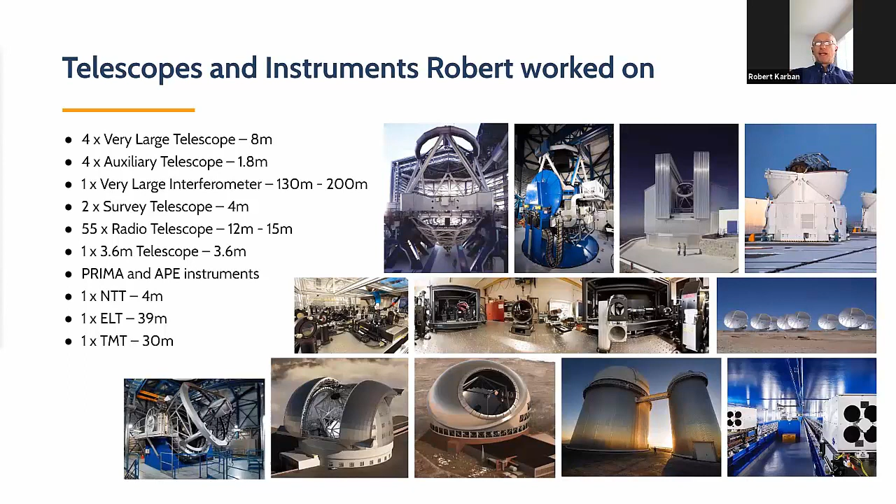My background, most of my life, I've spent with telescopes, mostly optical, a little bit of radio. Also, me and my team contributed to a number of missions at JPL, most recently Perseverance, which happily landed on Mars, thanks God, and everything is working perfectly so far, much better than expected.

You mentioned already the goal-oriented architecture. That's from a recent paper that we published at SPIE with my ex-colleague and friend Luigi from ESO. We've been working on that for a while, but it's just recently been published.

So what are we dealing with today in telescopes? What everyone knows is that most of them are one-off machines, and there's a substantial amount of emergent behavior. You have all these subsystems, and they come together to produce the behavior that is needed to perform the observations.

I guess it's the same for the SKA, but I'm talking more here from my experience on the optical side. There's an increasing number of operational modes and control strategies required with the scale of the next generation telescopes, and they need to be coordinated, and they're often subcontracted subsystems that have to be integrated.

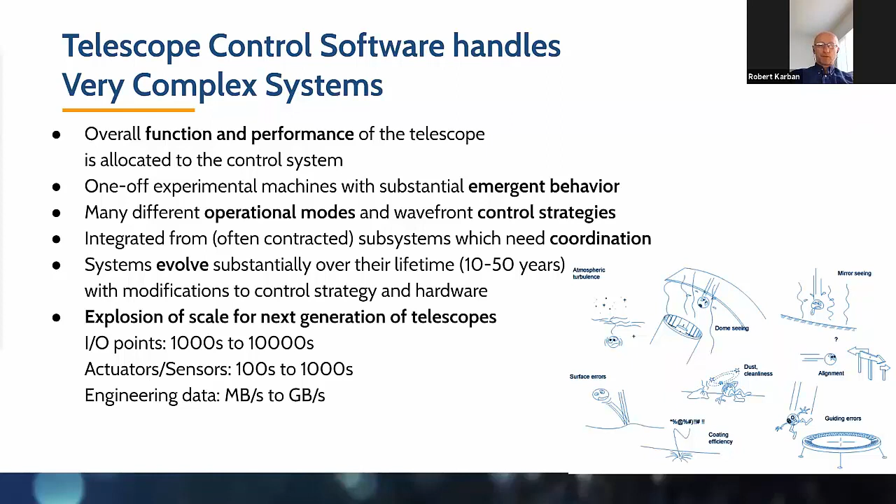The lifetime is very long, as you know. Here's just some numbers from the ELT that I know, and other extremely large telescopes like the TMT: the I/O points have increased by an order of magnitude, the actuators and sensors have increased by magnitude, and the engineering data flowing has also increased. So we're dealing with quite complex systems compared to what was there 20 years ago.

Now, due to this scale, we have also an increased risk of component failures because there are a lot of components and they might fail anytime. So the control strategy must be flexible and adaptable to deal with those failures and reconfigure - first detect the failure, isolate it, and reconfigure the system if necessary to deal with it.

The poor human in the loop is sometimes getting more and more overwhelmed by the available information on their screens to make the right decision depending on the operational scenario. And there is a lot of interacting and distributed control loops, typically with many connections.

When modifications are made, a number of implicit and explicit dependencies have to be considered in the software. So you might turn a little wheel here, which has an effect somewhere else, which makes it sometimes hard and difficult to tune the individual loops and integrate them end to end.

So how we want to tackle that is with a goal-oriented architecture that is based on goals and states. Let me give you an analogy. Everyone, I guess, knows Google Maps, right?

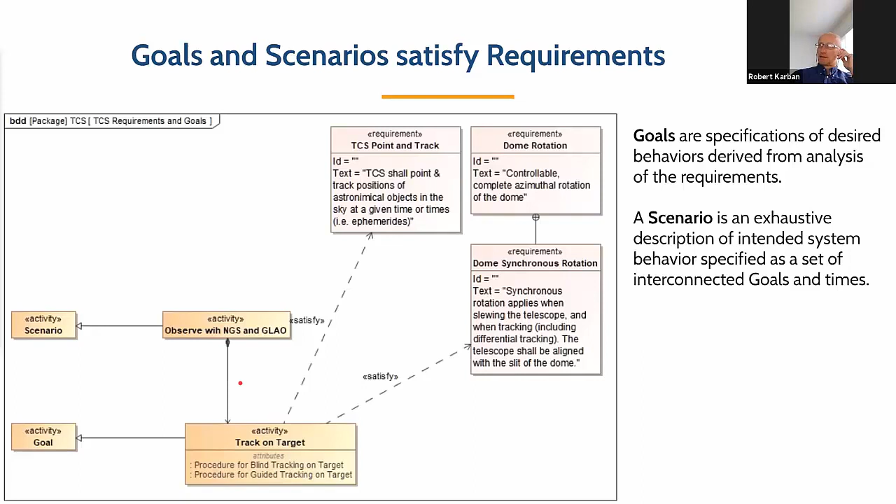And then you establish some goals, like you want to track on target, but you don't really care how you track on target. That's something the goal doesn't specify, it just specifies maybe some parameters, some constraints, but how you actually achieve that is up to the control system. And some scenario, what some people call the goal network, which consists of a number of goals. Here's only one, but there could be a whole bunch of goals. They can be interconnected, depending on each other and so on.

Now, with that goal, those goals, we refine what we call procedures, right? So depending on certain conditions, here the example is we perform either blind tracking or guided tracking on the target. So a number of environmental conditions, and that's happening on the control system level. So you say track on target with certain constraints like the accuracy and so on, and then based on some procedures and some predefined rules, the control system will select what to do, right? What's the best thing to achieve that goal.

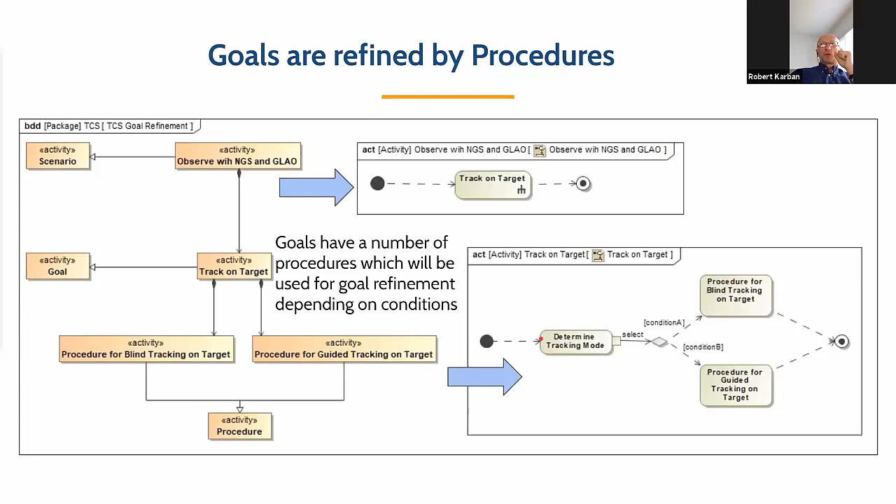And we capture all that in the model, right? So we capture the requirements, the goals, the scenarios, and they're all connected. So that's all coming together in the model.

But the real driving thing for those goals is: what do we want to control? And that's often not so clear. So what is introduced in this architecture are so-called state variables. These are the things you care about in your system, internally but also externally. And here are some examples.

So one state variable is the telescope pointing on sky in altitude and azimuth. But it is affected, and it affects some other things. For example, the observer position on Earth is affecting that pointing, the rotation, the modeled imperfections of the mount, but it also affects the target wavefront, right?

So these are state effects, as they're called. You identify all the physical states that you care about in the system, but also externally, and determine how they affect each other, right? And these are basically the things you have to control when you build your control system. Some you cannot control, of course, like the Earth rotation, but they have an effect on you.

So the goals are constraints on those state variables. When you have a goal, it's associated with some state variables. For example, I want to have a goal to point on the sky in certain coordinates. And then from there you say, okay, if I do this, then I also have to take care of true pointing, the azimuth position, the altitude position, the imperfections of the telescope,

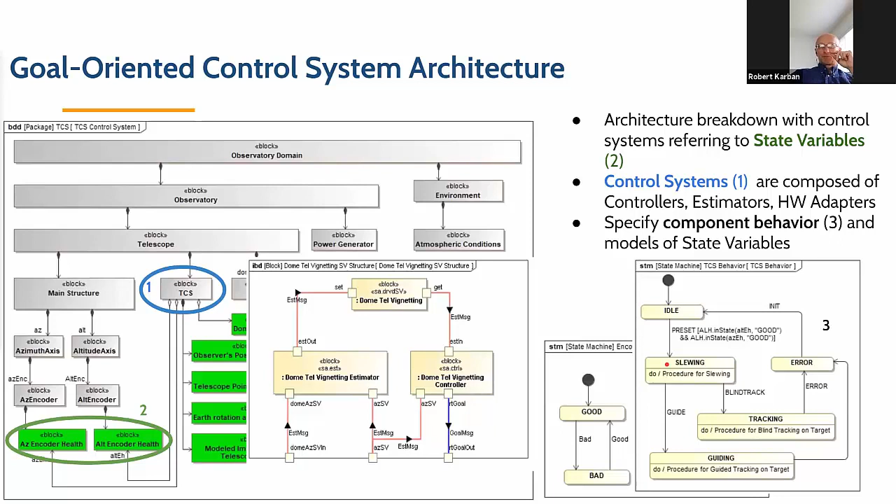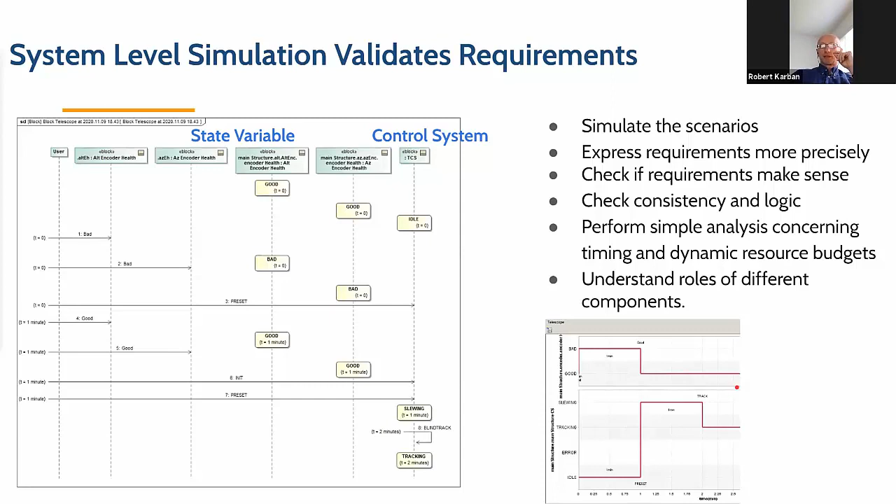And then you send that to the control system, and the control system, based on that goal and its strategy, does whatever it can to reach that goal, right? And if it fails, the planner executor, similar to Google Maps, will find a way to reach that goal by issuing new goals. And then you have some plots here.

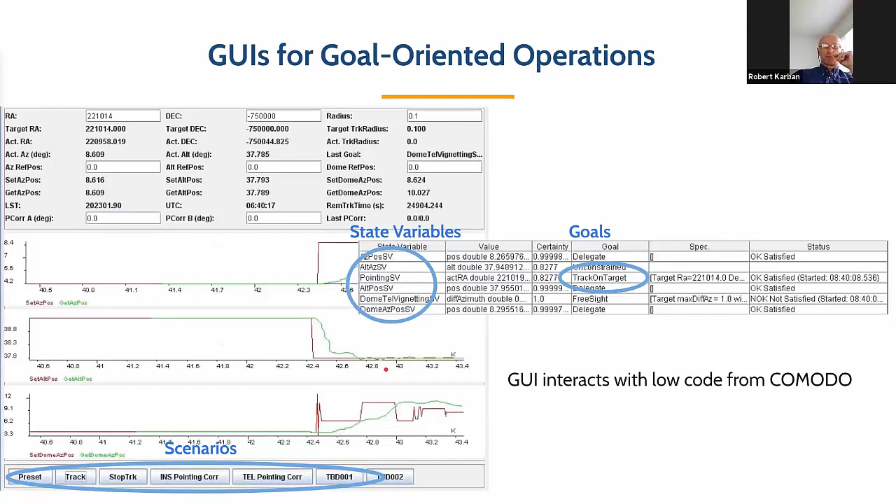So that architecture, what is important is that with the state effects model, you basically represent the end-to-end knowledge. So you identify deliberately everything that you want to control or need to control, or which affects your control. So you can identify the necessary goals, enable the reconfiguration, rescheduling of the goals to adjust to new situations, but it also enables the end-to-end tuning.

So we also have a separation of concerns from what the control system is, what the system under control is, and that allows us to better design the control system, identifying the measurements, what is estimated, what is controlled. So the state-based pattern that I mentioned before, the control diamond, allows to extend this control system in a consistent and systematic way. Whereas often it happens, you just add things. Well, maybe not usually, but sometimes it's a mix of course of engineering judgment and architecture, but here you have some guidance of how to do that.

So I spoke about the executability before, simulating it. So what is it about that? So why do we want to have an executable model at system level at all? Why don't we just go ahead and make some diagrams and start implementing? So the main point, if you build a model that actually can execute and simulate, is that you increase your understanding of the system before or while it's built. And you'll see you can capture the logic, the interaction, the interfaces, and validate the requirements in a system model.

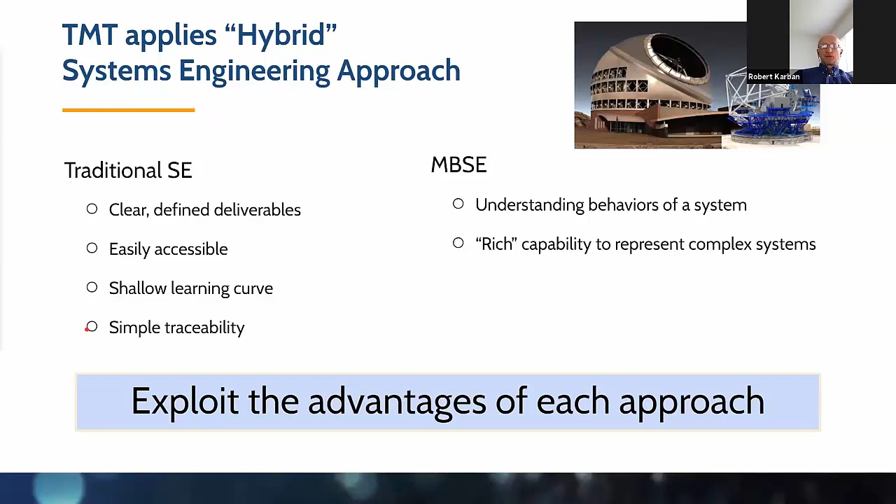But of course, there is all this other traditional system engineering going on. So in the end, there is a hybrid that uses the advantages of both. We use the MBSE focusing on, let's say, the behavior, but also the functional interfaces, and to perform analysis, and combine it with the traditional system engineering approach. So the objectives there are and were to capture operational behavior, which subsystems are involved in those operational scenarios.

Very important, and this is something that came out, is that the interfaces and how the subsystems interact kind of emerges when you capture that. There's a lot of timing requirements, that certain operation scenarios have to happen in a certain time. So we captured all those timing requirements, formalized them, and had an executable model with state machines and activities to specify that, and then to analyze if we meet those requirements in terms of time, power, and other error budgets.

Using the model, we also produced a number of engineering documents, and we used only standard languages and techniques and off-the-shelf tools. So there was no custom development to enable that. And this is something you get out of that.

So that's a sample TMT timeline where you basically see, for a typical scenario, the involved subsystems or components of the as-designed system, the states, and the timeline of which component is in which state for which amount of time, right? I think that's the scenario for extracting a segment, replacing it, and phasing it again.

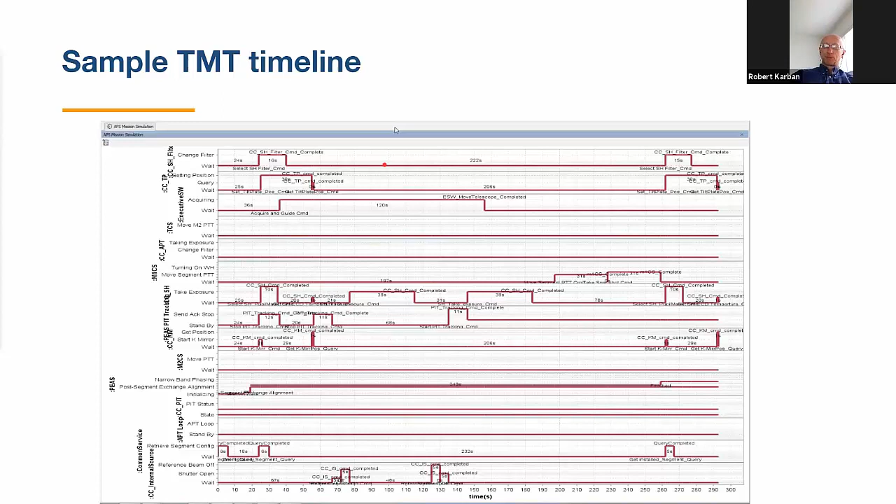What you see here is basically the overview of the workflow that enables that. We have some requirements that are textual, coming from the TMT project office. We capture those requirements in the SysML model. We formalize them in some way so we can actually trace them through the whole model, not only as text but as a formal element.

And then we have two designs. One is the logical conceptual design, where we basically identify the components and how they interact at the functional level, which we then use to validate the functional architecture, and a realization or implementation model where there are actual boards and translation stages and so on, in this case used to analyze the power draw of that system.

And we perform automated analysis for a number of scenarios to validate if that as-designed system can meet those requirements. Whenever we change something in the design or the requirements change, we go through this workflow and we get a result of, okay, still met, not met. And we produce the engineering documents from that.

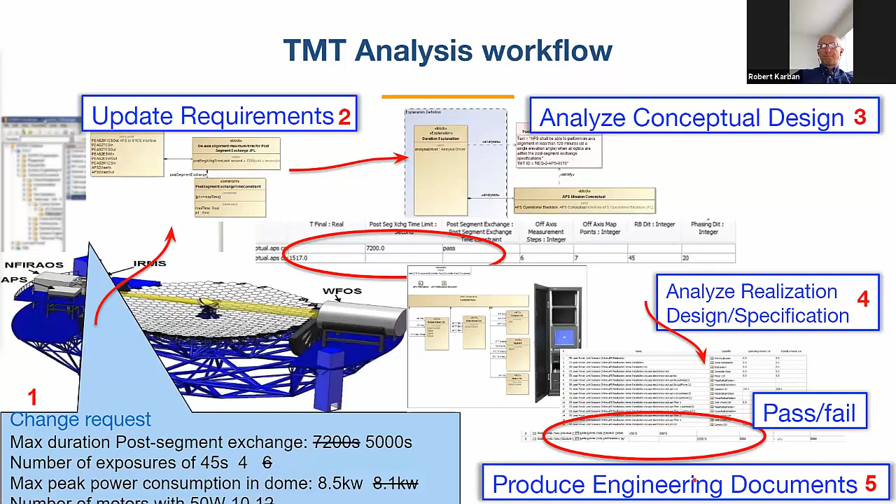So we follow a method, which is the executable system engineering method. Basically five steps: we identify the boundaries of the mission or the system that we want to build, elaborate the conceptual architecture, capture the component behavior and the characteristics, specify the interactions, and then perform the analysis. So let me run through this a little bit.

So this is an overview: we get some specification from the TMT project, we meaning JPL. We elaborate that into some logical architecture, identifying that's the system we have to design. It interacts with a number of other systems that the telescope provides, and we identify those interfaces. And that's an incremental process. It's not that everything is there upfront, but we capture all those elements, and the architecture evolves driven by the behavior.

There's a number of use cases that we model: the post-segment exchange alignment, off-axis measurements, and so on. And for each of these scenarios, we basically capture the behavior, perform the analysis, and see if the as-designed system satisfies those requirements.

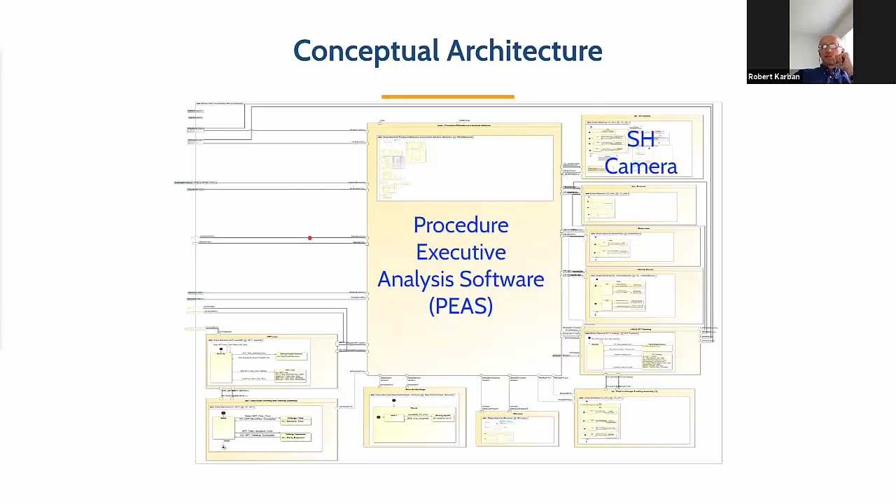So this is the alignment and phasing system software, which interacts with the TCS, M1, and other systems to achieve the goal. And all the components are modeled, all the behavior is modeled.

So here is an example of the scenario I mentioned before, the post-segment exchange alignment. It's a number of states that you have to go through to align, phase, correct rigid body, and so on. In each of these states, there is some activity that describes what to do: take an exposure, identify the spots, and then correct the telescope, right?

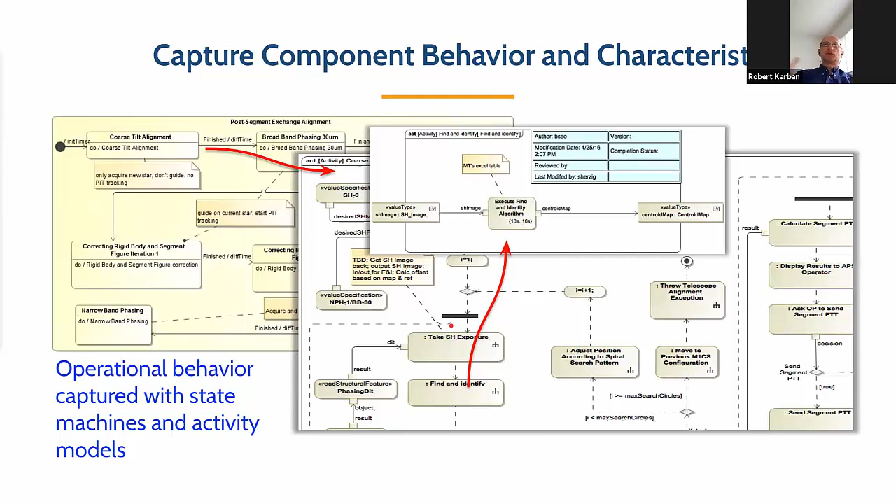And that sometimes goes five or six levels deep. There we capture basically the logic, but also timing constraints, so we can analyze, when we run through this whole scenario, whether it meets that specification.

Now, since there is not only one component but many, they also communicate and interact with each other. And that turned out to be extremely valuable, because by combining capturing the component behavior with their interactions and then simulating, you actually execute your interfaces. And I repeat it, you execute your interfaces. I think that has been a big benefit.

So you see, okay, these are the interactions, these are the interfaces, and with the simulation analysis in the executable model, we can actually see what is necessary as an interface, what runs over the interface, how it is used, and how those different components interact internally but also externally.

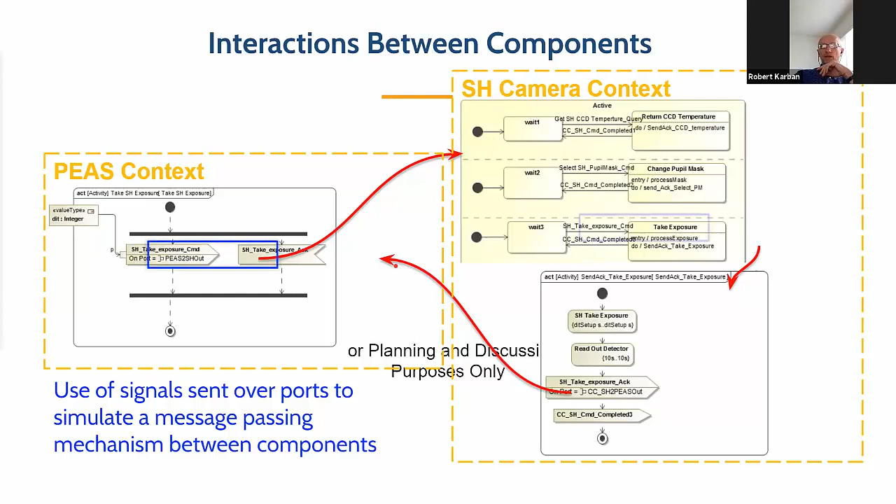And then you run the analysis that gives you, depending on what kind of analysis, a number of results. You configure the analysis with certain conditions. You run a timing analysis, a power analysis, and you get some plots, tables, and value profiles that you can integrate into your documentation.

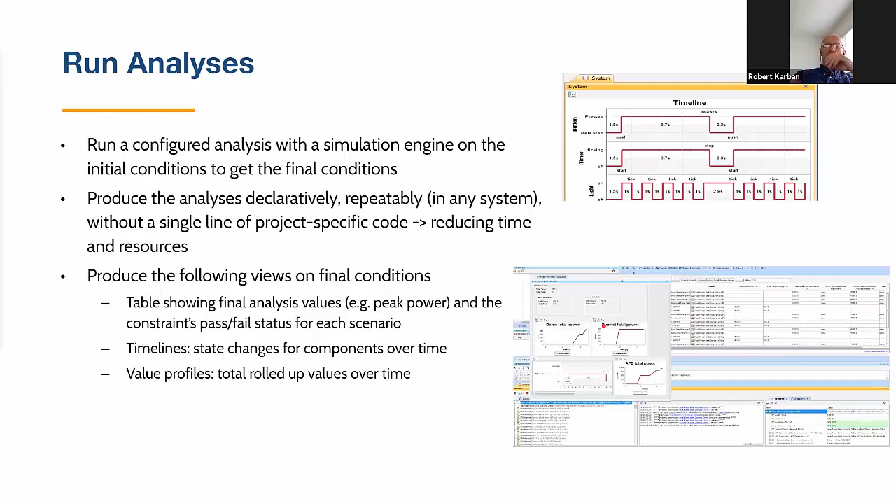Now we have all this beautiful model and the results, and then how do we get into the document? We don't copy paste it. We actually generate the documentation using something called View Editor and OpenMBEE, and I'll talk about that in a second.

So we close the gap between the engineering work and the documentation, where we basically generate the documentation, part of it from the model, and combine it with a narrative that the system engineer types up, and we have a live engineering document that closes that gap between engineering work and documentation that the system engineer always has to do.

So what's this enabling technology that allows you to do that? OpenMBEE is the one that I'll talk about here. So just as a reminder, what model-based system engineering claims to do: it's the formalized application of modeling techniques to support the whole range of system engineering and analysis activities, requirements, design, validation, and so on. Typically you use some modeling language and some method that guides you through this maze of things.

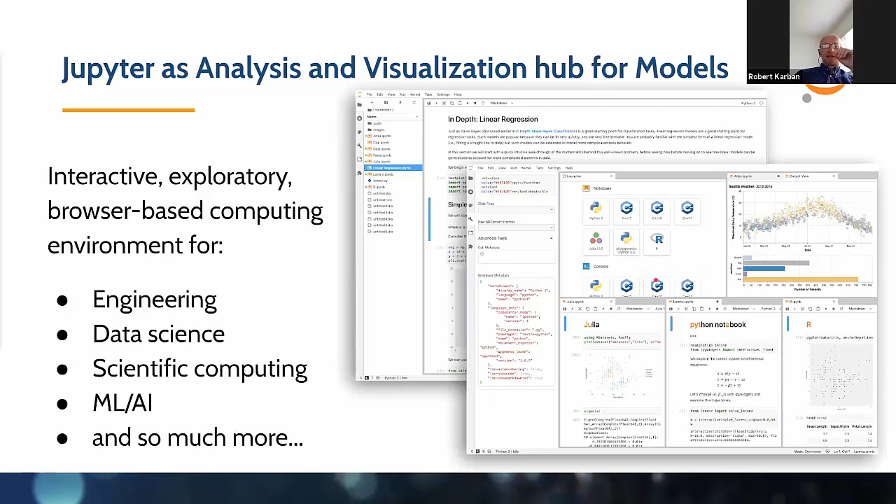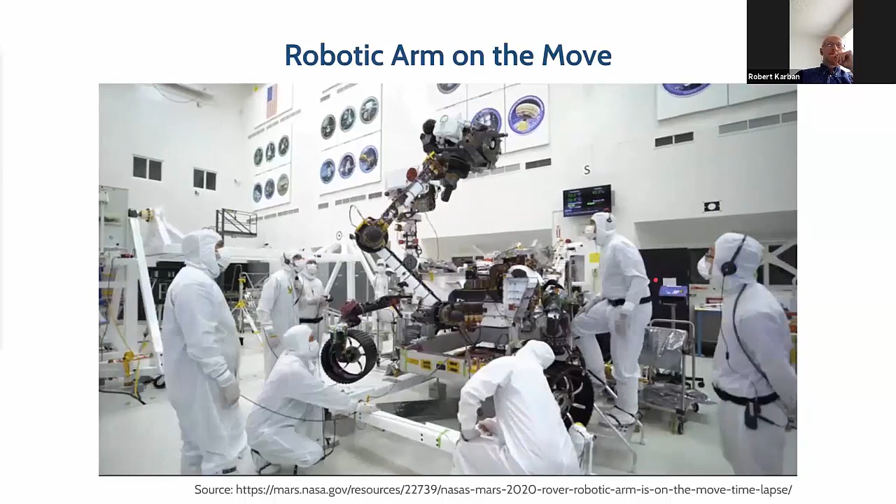We'll not go through that, but we use that, for example, on the rover. Jupyter was used to build the test procedures for the robotic arm, where we have the whole test procedure captured in a Jupyter notebook with sign-offs and so on, and basically run through that, can automate it, and it can be connected with various model-based repositories if needed.

The OpenMBEE environment, which is at the core of this. So we have the language, SysML, we have architectures, but in the end, all this only works if there is an engineering environment that supports you in your activities. It doesn't help if you have wonderful models, but then it's stuck in some tool.

So over the last 5-6 years, this community has formed. OpenMBEE is a community for open source modeling software and models. And it has been growing quite a bit. We have currently more than 400 members from different organizations across industry, from aerospace to automotive, all having the same goal: building a model-based engineering environment that enables to perform system engineering tasks, system engineering analysis tasks in a model-driven, model-based way, providing some core software, but also people contribute models to that community that can be shared and reused.

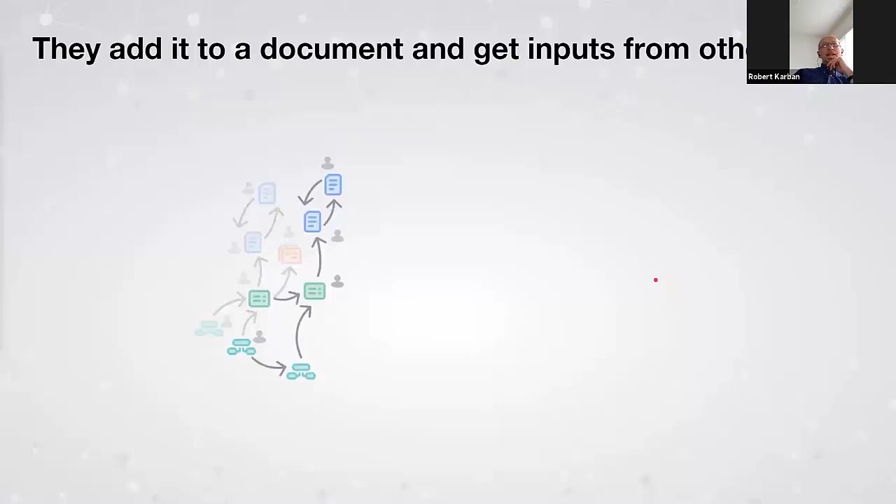People iterate on their models, enter the data into the rollups for mass, for example, get inputs from others. So the increasing network of documents, Excel sheets, PowerPoints, and so on, can get complicated very quickly, right? And then you have this guy here in the middle, the meeple, as it's apparently called, and he is kind of lost. Where is the latest information that I need? What is up to date? How do I find that?

So what is proposed, instead of having this maze of things where we have all these implicit dependencies and different versions, is to organize that, and shift away from email and manual data management to some authoritative single source, which is unified. To connect the information between those documents and the engineering work, so not to have this implicit thing, but actually connect those. So the information is referring to some authoritative source of truth.

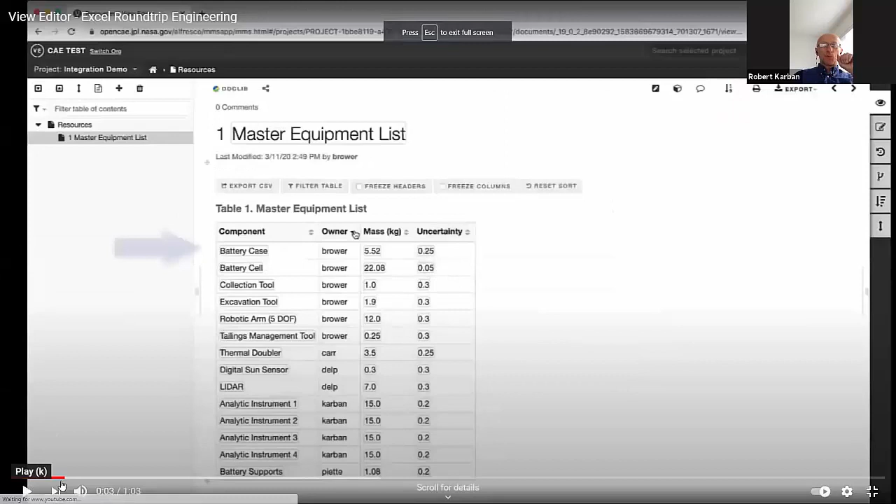So what we see here, this is the view editor, right? It's based on the ISO 42010 paradigm of view and viewpoint.

Basically you create a view for a certain stakeholder concern, in this case the master equipment list. All those things that you see on this page that have this little wire frame around them are actual references to the engineering model. Whenever the model changes, or you change it here, that's why it's called editor, it will keep both in sync, and you can build your document like this.

So what we'll see here in this example is that we're going to change the name of one of the components, and this actually refers, as soon as we hit save, in this case the SysML model will be updated. We update some values like the mass.

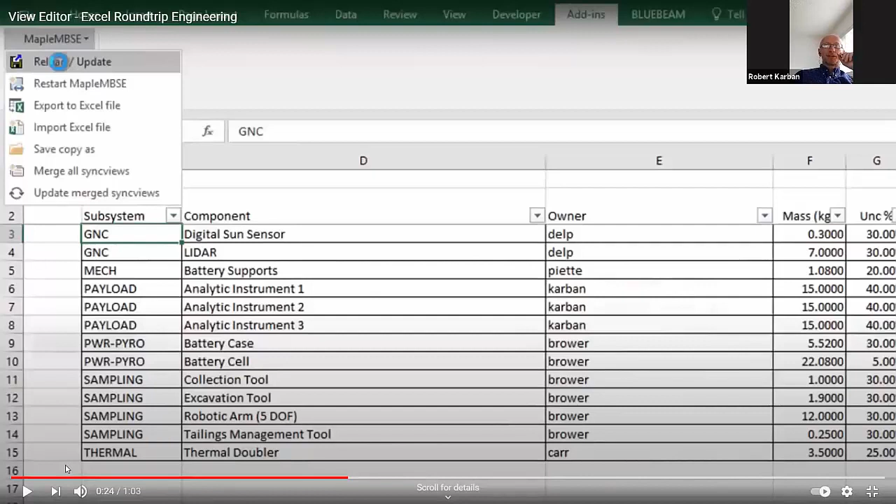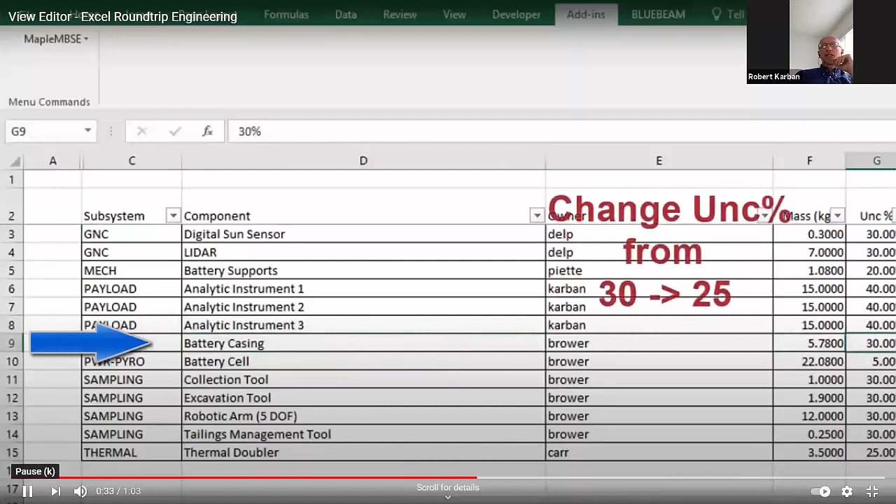And then another person uses Excel to do a mass rollup, for example. So here's the previous version. That person now updates the model and gets the new values that have been changed on the document side. So two different roles referring to the same authoritative source of truth.

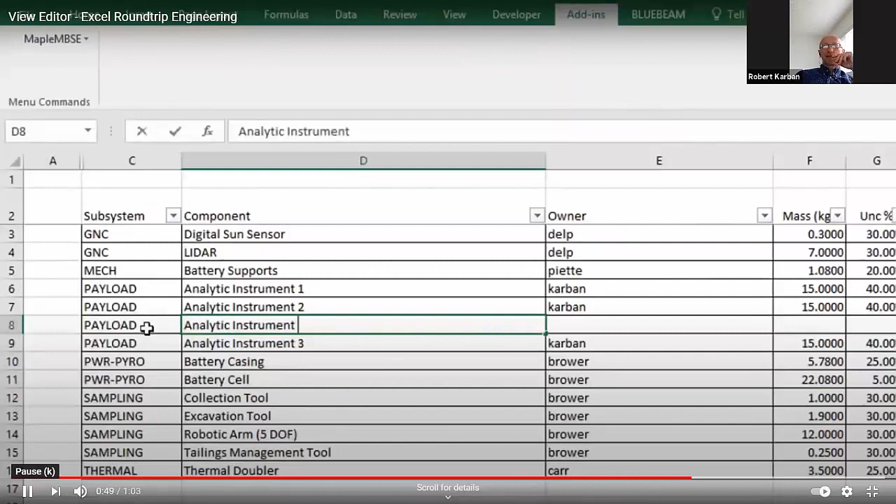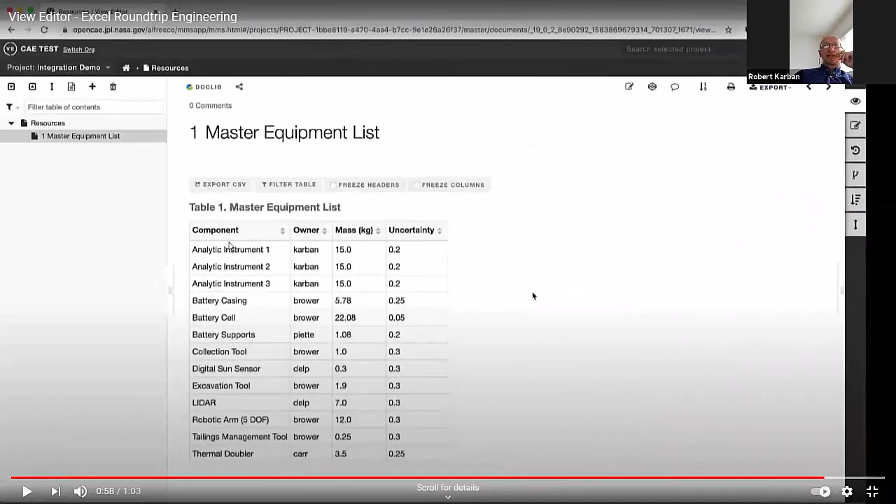Now this person adds another component here by simply adding a new line in that Excel sheet with analytic instrument 4 with some mass, commits it back to the model. And on this side here you see there are 3, and once that is updated, we get the change reflected in the model.

So basically this shows you how the interaction between different end-user tools or applications interact on the same model, producing documentation, but also performing analysis.

And an increasing number of vendors have built integrations with that open source environment.